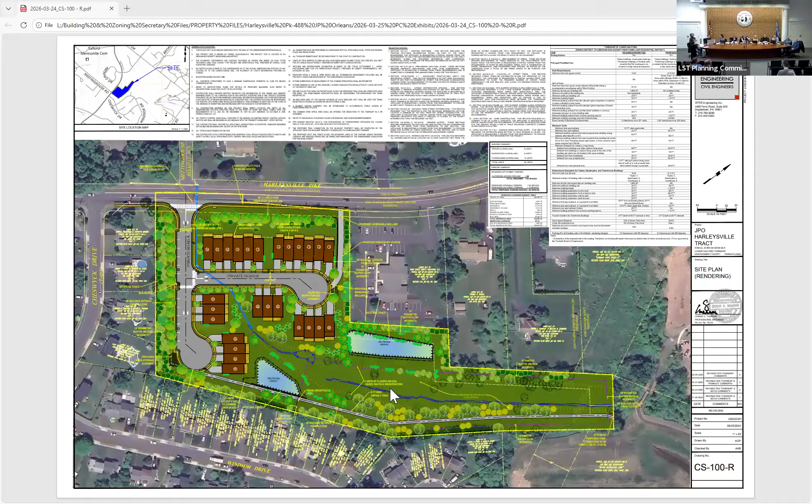I also have a question on the site plan, on the north end of the property. There's a label that says 15-foot perimeter buffer, medium intensity. Are there supposed to be plantings over there? Can you repeat which location you're talking about? Yeah, on that end of the property, there's a label that says 15-foot medium buffer - are there supposed to be plantings there?

There are already existing trees, that's why it's not showing that. If you can see the aerial image, there are already existing trees. And as you can see, there is a yellow line going through - those are the PPL right of way, we cannot plant within that. That answers my question, although I only see one existing tree there - I assume it's the gray one. I think what he's referring to is that along the property there's a dense planting of trees right there, so there wasn't a request to plant additional trees given the existing trees to the right of the property.

All right. Thank you for hearing that.

I would also like to bring to the commission's attention several community comments that were not addressed from the previous meeting in January. Neighbors along the south and west had questions about flooding - they want information about how a 100-year flood would be handled by the proposed stormwater design. That's an engineering question that has an engineering answer. Even though the authority to govern stormwater is within the state, I feel like this is the right forum for the engineers to explain how their design is the same or different than what would happen previous to the design. And if you guys have done your work well, the information you provide could reassure the neighbors that your design will accommodate the 100-year storm.

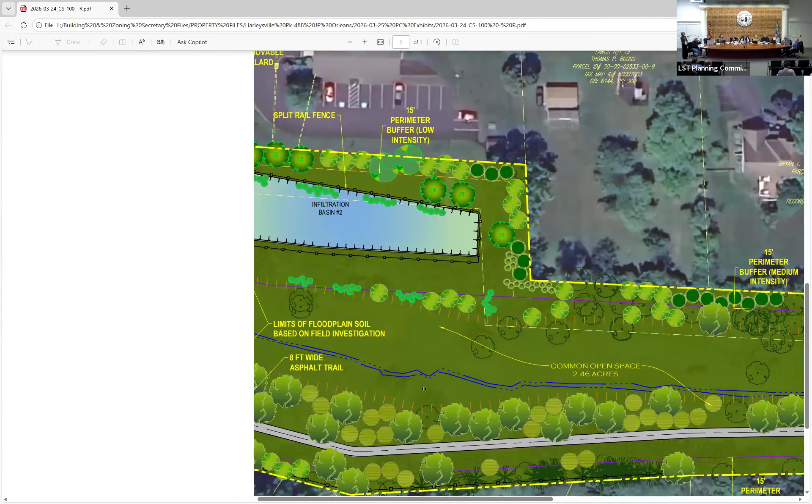There are two infiltration basins shown on this plan, each with infiltration capability in the underground. We've designed these basins to provide 100-year storm attenuation and meet the Pennsylvania DEP requirements for attenuation and volume control.

And are they linked basins as well? They are not linked basins, they are separately discharging to the creek in the middle of the site.

I know it's not a requirement, but I'm curious, do you know what the flood elevation would be visually on the map at the 100-year storm? If the 100-year storm happened, where would the water be located, and what contour lines would it touch?

Are you talking about the infiltration basins or along the entire property? I assume we certainly be within the property itself, it won't be coming to somebody else's property, if that's what your question is.

Are you asking what the elevation of the basins will be? Do you know from the bottom of the basin where the 100-year water surface elevation will be? It's about 3.5 to 4 feet, again, I have to double check, but that's what it is.

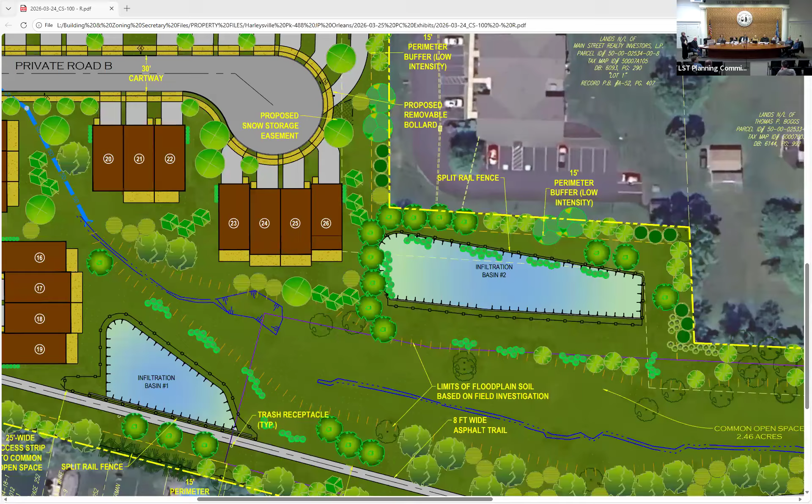Last question, to the applicant: the PNDI was previously filled out with incorrect information, and I was informed that a revised PNDI was obtained. The PNDI previously identified a potential conflict with the Indiana bat habitat, which is an endangered species. The neighbors have seen bats in the area, but obviously we don't know what kinds of bats they are. Would you be willing to share a copy of the revised PNDI at this meeting?

We do not have any of those submissions with us. I think you have access to them. I do not. Well, they've been resubmitted, we can get them. Okay, I can get them to my meeting, fine for them.

And so the other follow-up question I have is, was there an Indiana bat habitat identified, and what paths to compliance with the Endangered Species Act are you planning on taking?

I can tell you that we are going to follow every federal regulation that we are subject to. That's my short answer.

Yes, we'll get you a copy of the report, so you're free to take a look at it and come back with anything, but I can't imagine it would have identified that species and then not require them to comply with the regulation.

Okay, we won't get our permit otherwise, so you'll get a copy to Mike, and Mike, you can access it at the township office. I appreciate it, okay?

My name is Timur Karimov. I'm living on 590 Shakespeare Drive.

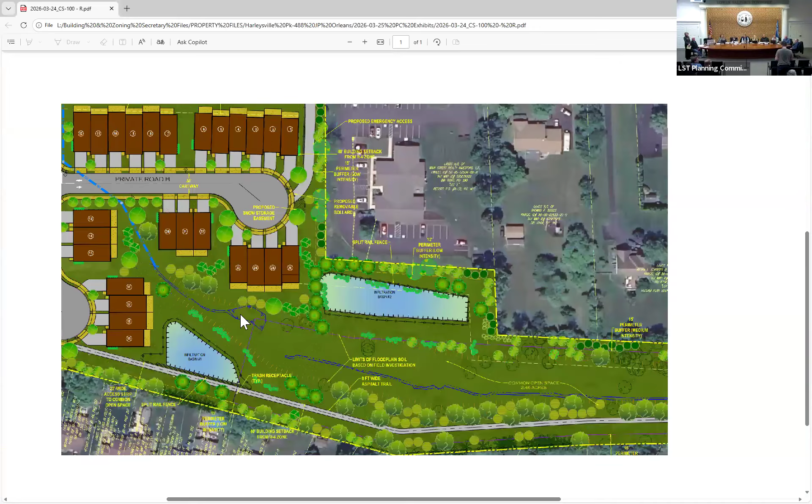The question is, how much of the property will be open space? Do the calculations, what percentage of it? 26%. Yeah, great. But can you show where it is?

You can see the green space on the plan, and there is a trail from the cul-de-sac along the back end of the property, that leads to the edge of the property. And then there is a trail connection at the edge of the property that will connect walkers to the township trail on the open space on the property next door. So basically most of the open space is primarily stormwater basins, water course buffers, wetlands, and slopes, right? This is the land where you can't build anything.

And rebranded it as a community. Right, I'm not sure what the question is, so we worked with them to make sure that they concentrated all of it to maintain as much contiguous green space as possible, and then with every development we try to interconnect trails to create both walking and biking opportunities throughout the county.

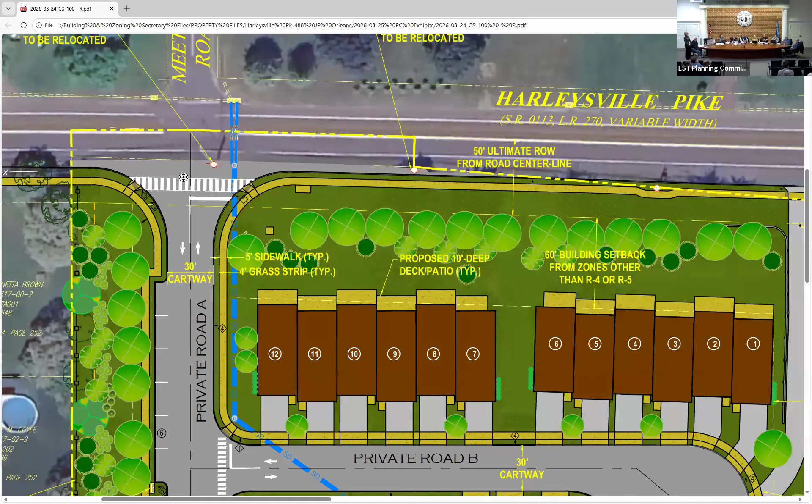We also, as a community, encourage the trail because now that's on all of us - we want a trail, but are we not opening something up? The point is, should we not put a trail there so as to not encourage people across 113? I would say, I think we try to put trails in wherever, and I think the folks in Cheswick will benefit from that. I don't think we would not put a trail so as to discourage people from crossing 113. Then how do we make sure that they can safely do that?

Because in the planning, I don't know that the applicant wants a trail or I want a trail, but I also don't want flattened children that I love dearly. And speed rates and whether there's a traffic light - again, there was just another accident right there. You now have another left turn. Again, we want the trail, but...

We're not going to withdraw the trail, and we can't decide if PennDOT wants to put a light there. I frankly expected that they were going to put a light in, and they haven't thus far, so that's really their call. As far as the crosswalk, it's not on the plan to me. Yeah, that was my fault - it's a water pipeline thing there, I apologize for that.

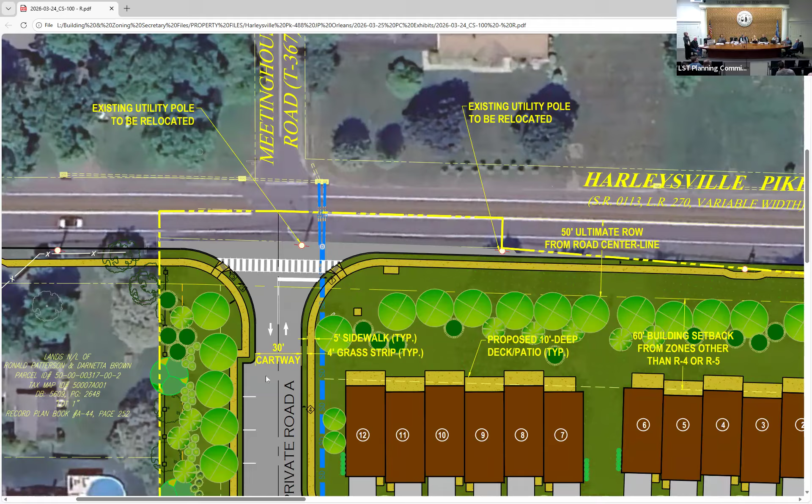I don't know, that just kind of spells attractive nuisance to me. Is that the community that would pay for that? Or, if they're giving the right of way, is the applicant installing the trail too? We're installing the trail because we're required to install the trail. We have nothing to do with what happens on 113.

Right, but we're encouraging them to install the trail, which we think is lovely, but the way you get to that trail seems important. If you want to ask the supervisors to waive the trail, I think as a matter of policy we always encourage trails, because if 5 years from now they put a traffic light in there, we can't come back and ask them to put the trail in. So I think we always have a bias toward that. But if your point to the supervisors is don't have them put a trail in because we don't encourage people, I'd like you to do it the right way.

I would love to use that trail. I cross at Cheswick, I take my dogs across. We have kids that go across all the time. Just Halloween we had groups of kids crossing, and generally throughout the year, adults and kids. It's very attractive what you're doing here, but there's gonna potentially be costs to consider.

For a crosswalk, but, well, I don't think we can require that.

Bob Mangus, 509 Oakland Avenue, neighbor to Allison here. Maybe along the same line of thought. Understood everything that was just said, that 113 is governed by PennDOT. The trail system is something that we want to have in the area.

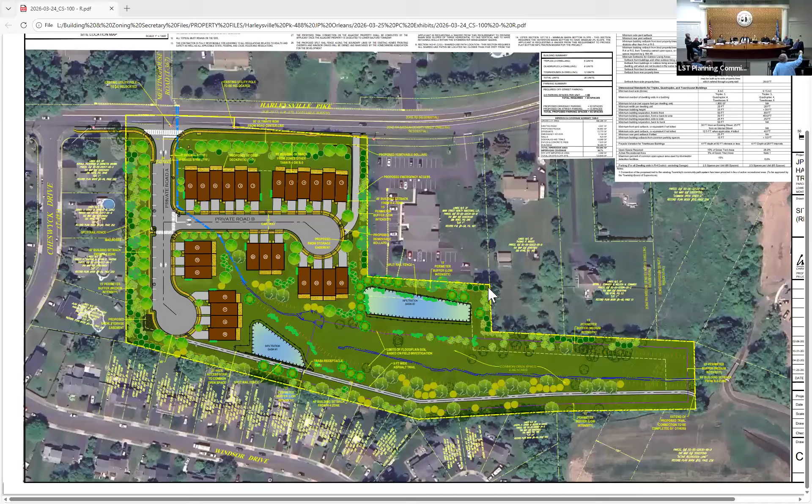That's not a safe place to wait for the bus. In that area - and I keep pointing here, which isn't on the map - where private road A comes out and meets Route 113, I understand about the 8-foot area reserved for a bike lane, and there are a lot of questions about how traffic will turn right. Will there be a right turn lane so people can bypass traffic turning off the meeting house?

There's a lot going on in that area - the bike lane, the right lane, and then you have snow, like this past winter, a lot of snow piled up there. And then you have kids standing out on 113 with cars whizzing by at 50 miles per hour. I don't know anybody who would want their kids standing on 113 waiting for a bus, being pushed into the road because of the snow and other things that haven't been addressed.

I'm very concerned about it. I think a transparent bus shelter needs to be erected somewhere on private road A, so children can be kept within that area, protected so no one can be up to no good out there. Then the bus can come along - I understand you didn't allow space for a bus to enter that private road - but if it can come along, the kids can leave the shelter and enter the bus far off of 113.

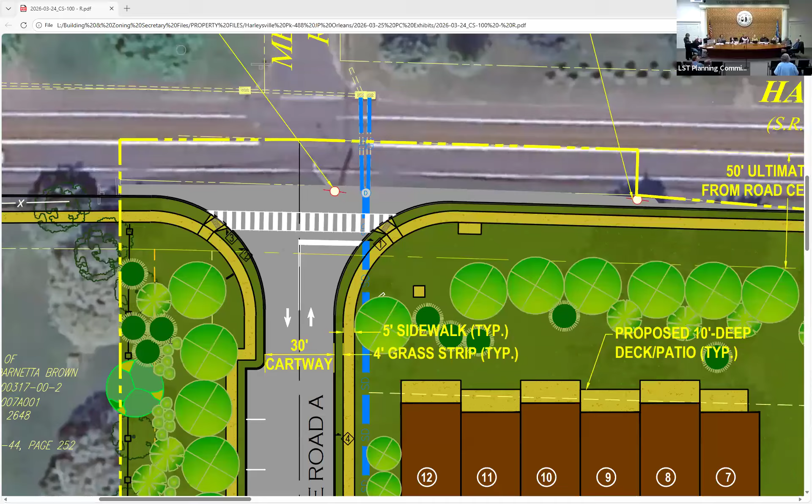I'm still not seeing the 6-foot privacy fence along the perimeter properties, which has been referenced by a number of people. I understand from the last meeting in January that a split rail fence was talked about being erected along the property, closer to the perimeter between the Cheswyck property and the proposed development.

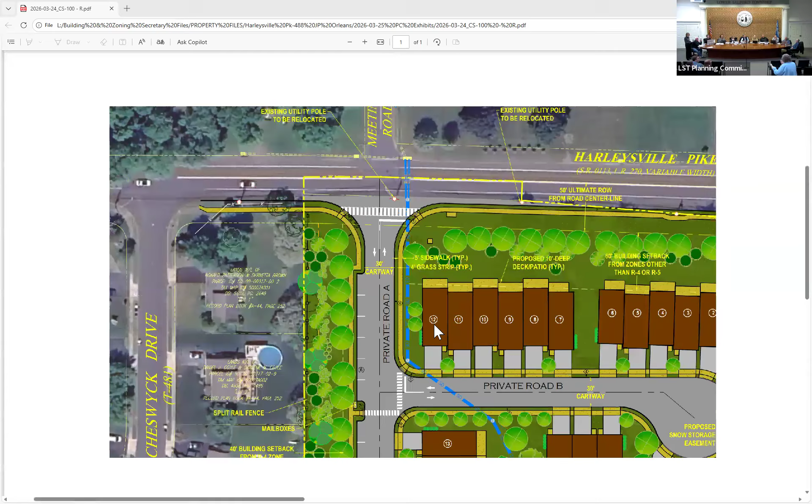I agree, I have to agree with the Duddies. There's nothing to stop people from going through a split rail fence - what's the point? That's a waste of time and money. Put up a 6-foot perimeter fence and everyone would be happy. They wouldn't have troubles with privacy or lights coming into their property, and they wouldn't have other people wandering into their yards. I don't know what the big deal is about putting up a 6-foot privacy fence, which would satisfy so many concerns.

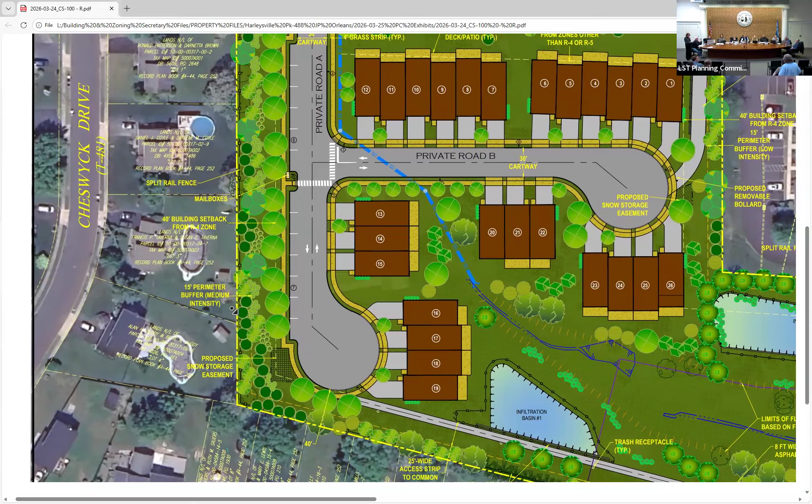About the infiltration basins - does anyone here really think a split rail fence will be adequate protection to keep children from those infiltration basins? What's the point of a split rail fence?

I'm sorry. Maybe, is it gonna be a wire mesh, like 6-foot high wire mesh against the split rail or something? It would be a wire mesh along the split rail. The split rail is only 48 inches high, so 4 feet high. Okay, would the wire mesh also be along the split rail?

Along the perimeter properties? Yes, with mesh. A 2-rail split rail wood fence with mesh on the perimeter, along the boundary, as approved.

I'm wondering how this proposed development is ready to go forward with all these unresolved issues. And wouldn't the township be better off using this as open space?

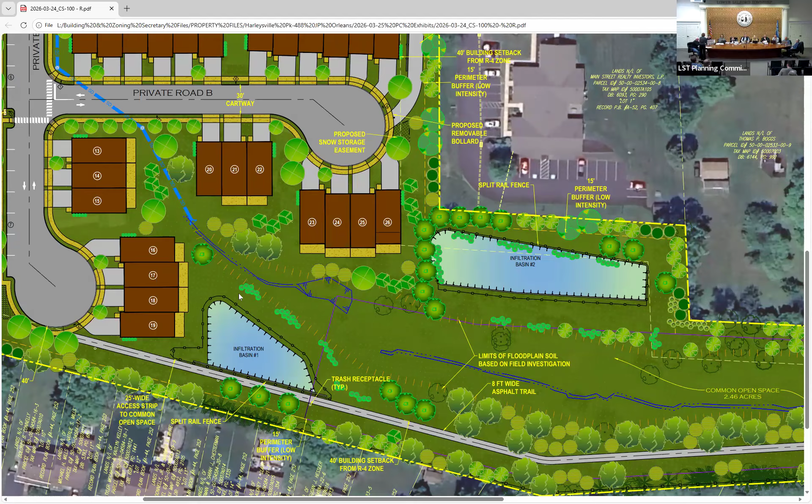Thank you for your patience. I do want to say thank you, and I've written to you guys, I appreciate your work. I want everyone to know that you're a volunteer committee too, and there's an extreme amount of work, the volume that we have, and all the skills involved, so I appreciate you guys more at each meeting. I also feel there's a lot of open issues. I don't understand the rush for final approval at this point, and I gather that from the crowd, so let me just explain.

At this point in the process, as we've resolved the design and planning issues, there's usually an open list of technical issues. That's why the applicants say they will comply. As the township engineer has stipulated, here's the things that we want to resolve, and the applicant says we acknowledge what you're saying in your letter and we will comply with that. Then there are outstanding third-party approvals that still have to come in. The plan can't get finalized until those approvals are received. So us moving it forward, if that's what the members decide tonight, is always stipulated upon satisfaction of the technical review letter and the third-party approvals. Just so everybody understands.

So with that, I will ask if there's anybody interested in making a motion for final approval. I move for final approval of the plan. Is there a second? I'll second. All in favor? Aye. Any opposed? Any abstentions? Okay, abstained. So that's six in favor. Thank you.

When will this be in front of the supervisors? This should be in front of the board of supervisors in May, because we need time to prepare the information. It will be publicly advertised on the agenda, which will get posted on the website once it's ready to go forward.

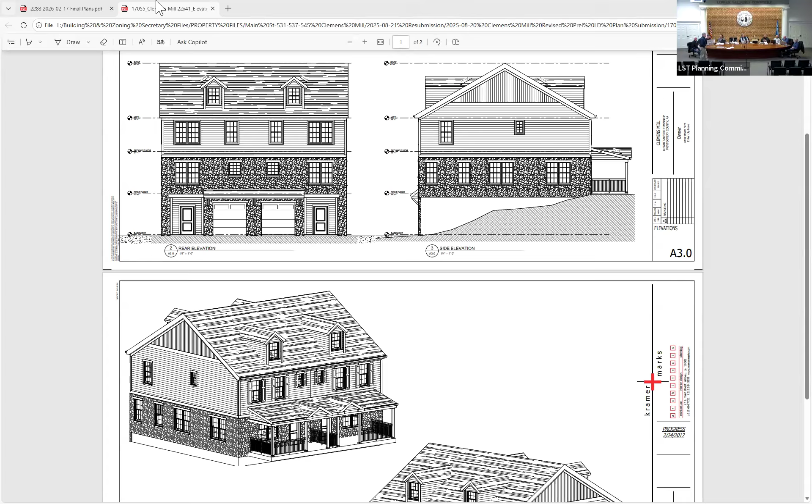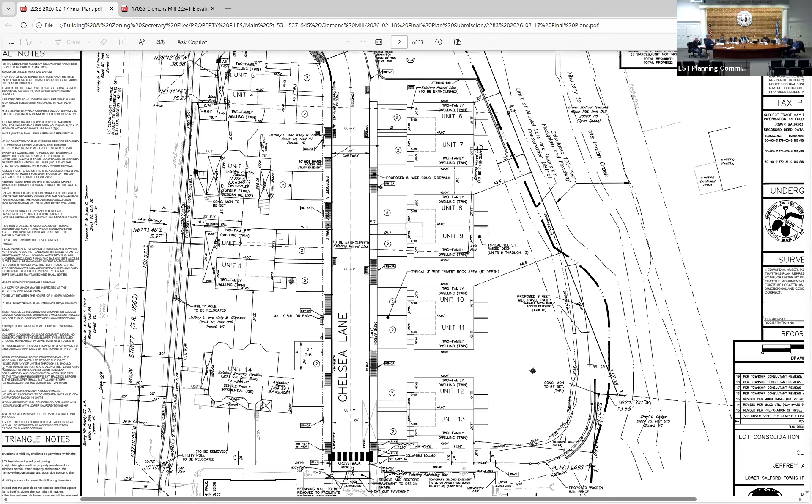So we've looked at this plan for years - I think my kids might have been in school when we started. Main Street is on the left-hand side of the plan, and some of those buildings are facing onto Main Street. Oh, so they're gonna stay. Yes. Well, some of them are new though, right? Two are existing, two are new. And we worked with the applicant to make sure the spacing in between and the setback is consistent with the other homes on Main Street.

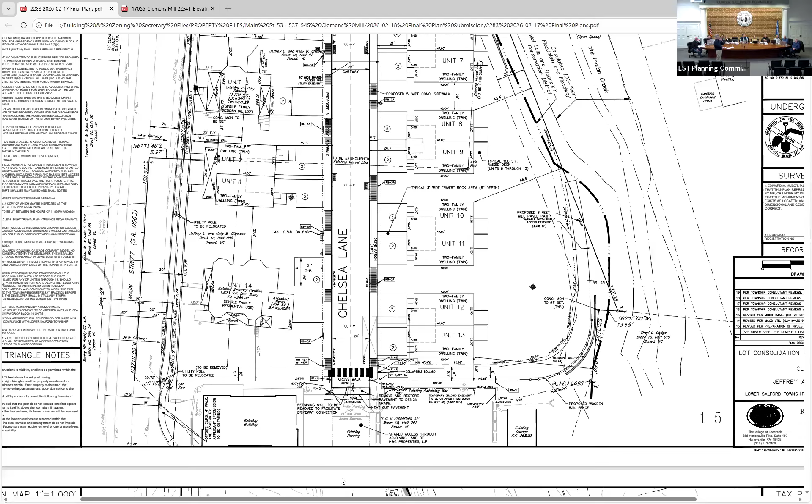And then behind that, you see other homes that face down the bank and they're all new there. And then it comes out to Maple? No, Main - it actually has a cut through to the Garris office building apartment. Correct, there's a connection right there to the driveway next door. Okay, thank you.

Briefly, this is very minor and may have been addressed elsewhere. We had a comment about the guardrail along Main Street - if you go to the top of the page where the road curves down into the development, the guardrail doesn't really follow the same curve, and on the landscaping plan you see two trees planted behind that. We just noted that might be a little difficult for maintenance.

So I did see your comment - I don't think I can change the guide rail, because I believe it has to move away from the curb to meet guide rail requirements. Stephanie had comments on that too, so I don't think I have flexibility there. Either removing the tree or some planting around it would require a little bit of adjustment. One thing we did change through the whole review is we created a flat area behind the curb to help with that.

Right, from that, there's the homeowners association. Yes, everything, even the road. Anything else open on this one?

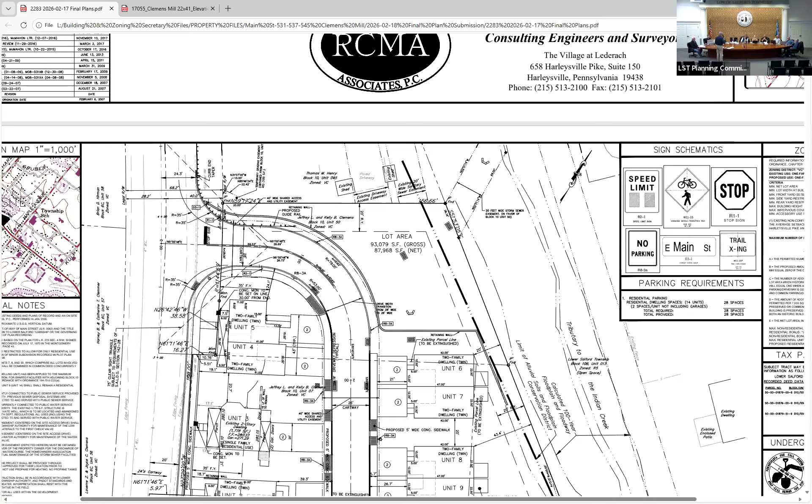Any other questions? No. Motion to move this one. I'll make the motion. Thank you. All in favor? Aye. Aye. Opposed? Any abstention? All right, thank you.

We'll close. I can retire. 110 Cassell Road sketch.

Hello, let me introduce myself. I'm Kelly McGowan. How are you all? Good, Ellen, nice to see you again. Good, good. Whenever you are ready.

Actually, if you don't mind, my vision. I would love you to, please.

So what you're going to hear tonight is possibly a sketch plan for potential development on a parcel that's an existing farm, 2 farms, on Cassell Road. We've seen numerous potential applicants come in with various ideas to develop this site. This applicant came to the building committee to get feedback from a combination of Julie and I and some supervisors and staff about what might occur here, as all the other applicants have done. What we've talked through with them is a real desire to maintain some of the rural character in that area. We've also asked them to meet extensively with the neighbors around it, to flush some of this out. Then we said let's get it in front of you guys to get a reaction, because there's a couple different ways we could go on this parcel.

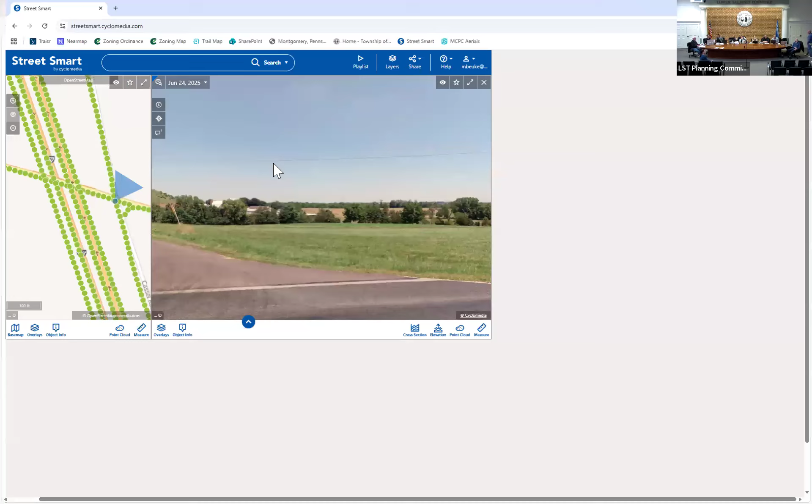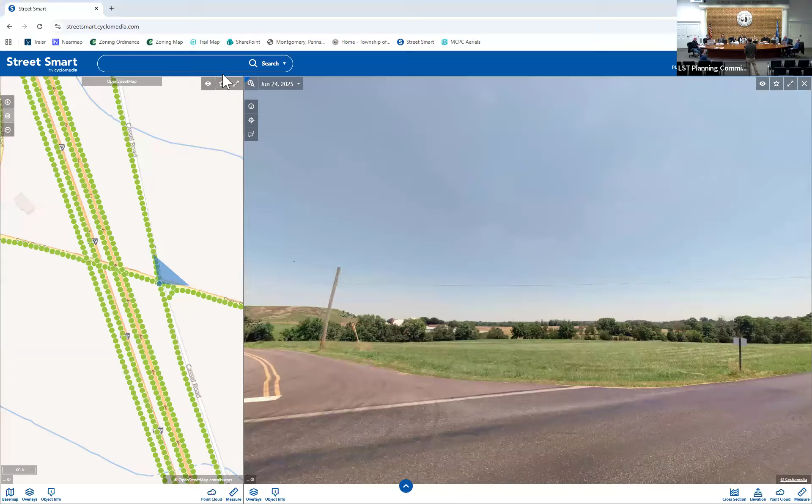Is there gonna be a swimming pool on it? Currently we have a small clubhouse and some pickleball courts proposed. We haven't finalized the amenities, obviously balancing the HOA and keeping fees down for the homeowners, but we are proposing some small amenities there — pickleball courts and a clubhouse.

The size of the pickleball courts is bigger than the size of the clubhouse. So if you're gonna make it an age restricted community, wouldn't you want to try to keep the people in there as much as possible? Yeah, and as we go through it — great comments — we'll refine the amenity area to make sure it fits the size of the community.

It does seem, looking at it, because of that tree line and the way it goes, like it doesn't look like you're gonna see that much from Fretz. You'll see some, but because that tree line is gonna stay, it's going all the way across. We're looking at Mr. Moyer's farmhouse or barn — you can barely see that from Fretz Road. And that's the high point on top.

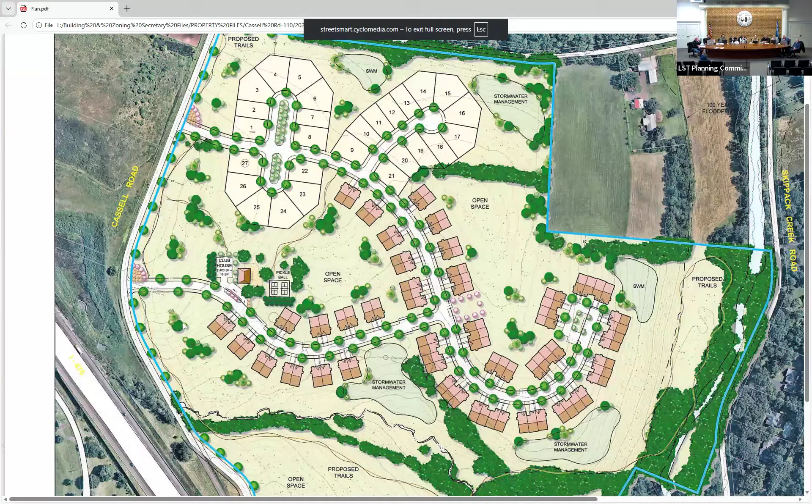It's closest to the top. And if you wouldn't mind going back — the farmhouse is right about here. Okay, the driveway, you can actually see it's a dash line under the road. Okay, so it's about the same, the first driveway is the first entry point.

The overall design — the things I like about it are certainly the preservation of the existing mature trees. And of course, that's something we want to see in the trail, it looks great. I would like to see the trail loop the property — like a perimeter loop. I know you have it back in the woods, which is nice, especially for an older community, as they just want to stay on the site.

I think the open space along the roads is great for the rest of us in the township not living here, except I don't think it's good in the top corner. I think it's great along Fretz and Cassell - that's Skippack Creek Road on the right, and Fretz is on the bottom. I think it's really good.

I think that the unit lots up in the northwest corner - you don't have that there, that's a little too tight to get the same great effect you're getting on the east and south edges. I think it's a little deceiving because we have the full lot shown there, the building, not the actual house, whereas on everything else the actual house will be set back.

Well, I'm picturing - is that where the big mound is across the street from here? Yes. So the big mounds are basically equal to the drive, the second drive, and that's the big mound.

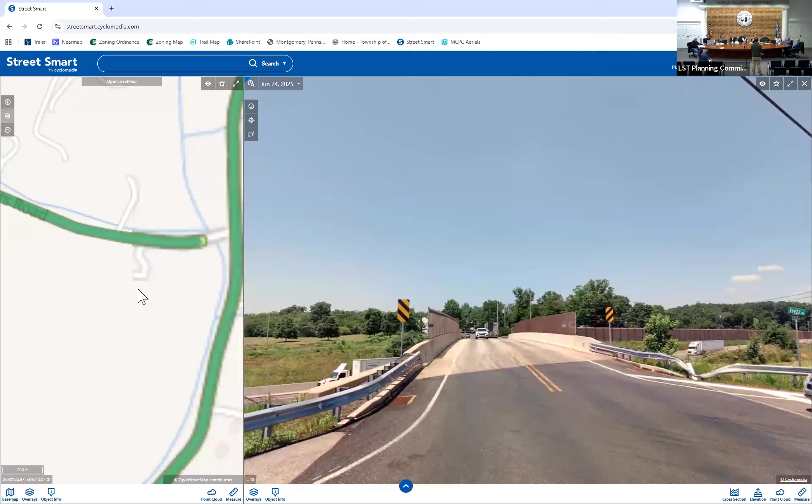Is there not that bridge? Don't close it out. Right, and that's where I'm going with this—if we can, is there an opportunity to use that bridge and Roberts Road as your bridge across Skippack for pedestrians? So that actually came up, mixed feelings from the neighbors about that, I think. We had asked the township as well, like if we should even look into it. We were told that it's probably too far down the process, that bridge is coming out, it's in rough shape.

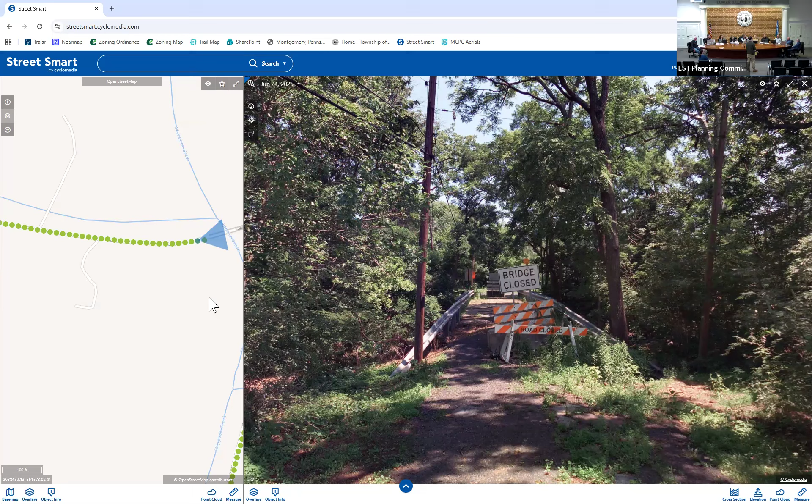When I plugged it in, it's like, Perkins, there's a bridge that's used. But one, it's far down in the process. Two, it's in really bad shape. Three, I don't know that we want to take pedestrians onto Skippack Creek Road—there's very little in the way of shoulder and sight lines along there, so it would introduce a bunch of people walking along that road. I don't know if they can do it. The other thing too is there's a farm in the corner that we don't control that would be highly involved with that, and you're sort of going across that property to get to there. So feasibility wise, I don't think it really works.

And I know we have one question from them, so I'm going to open that up if everybody's ready.

My name is Danielle Ingalls. I live at 120 Roberts Road—you're looking at my house, I'm right next to it. Roberts Road, or the bridge actually—I just talked to the county and it's going to be removed this spring, so that clears up all those questions. My major concern is just privacy. I moved there about 10 years ago, but I've lived on and off that property my entire life. My grandparents, my grandfather, built that structure that I live in today. So my concern is privacy, and obviously water, but I like that the trees are going to stay and I'm hoping they'll put more in.

And my other concern—there was a question about looping the property with the trail. I like the way the trail is presented today, and not that it loops my entire property.

Which house are you, are you the farmhouse? I'm the farmhouse, the farm on top of the corner, yeah. So we committed to working with the Ingalls, should this move forward—we'll review landscaping plans with them, stormwater plans with them, make sure it's something that works, since they are the most highly impacted neighbor on this property. We have an open dialogue with them and I hope we will keep that and make good on that promise.

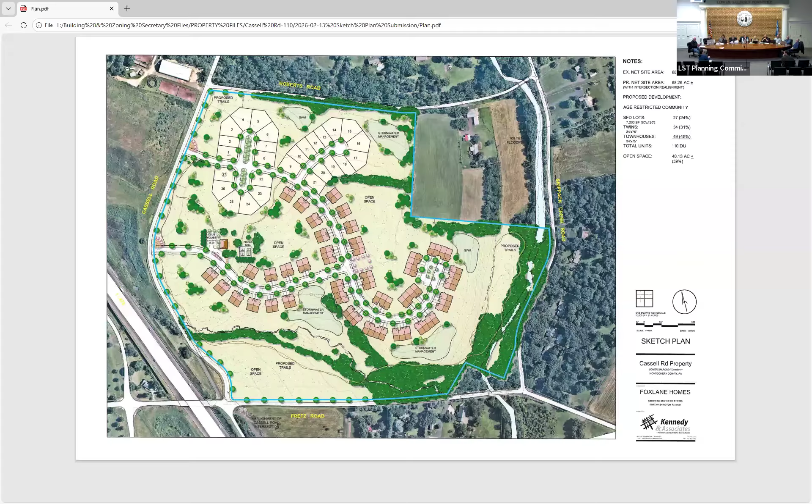What we were talking about is, as John indicated earlier, something in the form of an age qualified community, which you don't currently have in your ordinance as its own development type or its own use, similar to the golf course community. As I said, we went through the golf course community conditional use, and again, it really structures and sets up fairly well for a development like this.

So that's what we would really be modeling. As I noted before, we'd be doing it around 2 dwelling units per acre. We would be reevaluating some of your dimensional criteria, especially for your townhouse units, which are currently defined as requiring 5. This is a bit scaled down - these are showing townhouses like clusters of 3 or 4. So we'd be looking at some of those items, but if there's any direction that you prefer,

that's really what we'd like to take from here, so we can be bringing this back to the planning commission with either a working ordinance or with something for you to consider. So if any of you remember the land preservation overlay district, that's what's south of Woody, Hidden Tree, Hammersmith Farm.

And some of the provisions in that specifically require that the cluster get moved to the interior of the property to push the open space to the periphery to maintain a rural view. So I think those are the types of characteristics we want to impart here.

I think we also talked about in the committee, minimum tract size - I think we were saying like 35 acres, which at this point would probably preclude this being applied to many other places in the township. So we get the opportunity to say, hey, this is why it works in this situation, but you can't apply it everywhere because you need scale to create that open space and maintain the distance - you have to do that on 10 acres here, it just doesn't work.